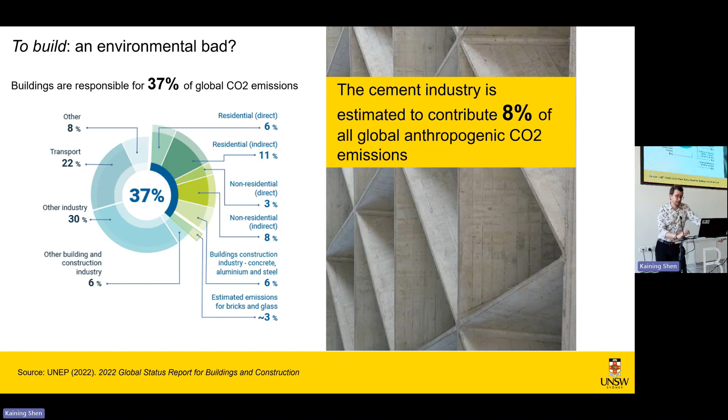The process of creating our built environments is fundamentally changing nature. This is an incredible statistic - I always find that if you weigh all our buildings and infrastructure, they now weigh more than nature. We are truly in the Anthropocene. We have now dominated nature, not in a good way even.

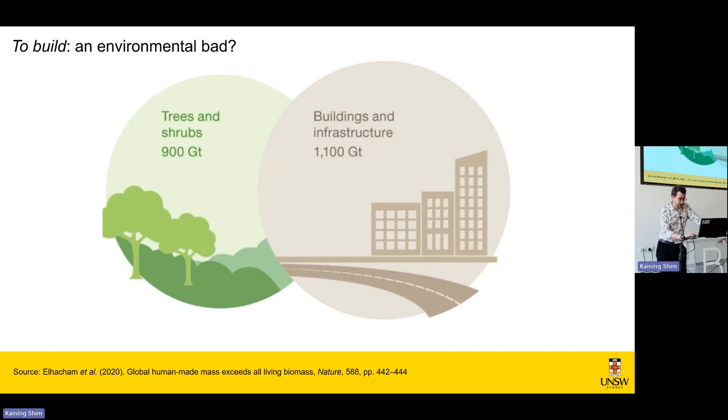So what can we do about this? This is part of what the research myself and some of my colleagues are looking at. If you measure the greenhouse gas emissions from buildings, they actually take place across what we call a life cycle. Again, you've all seen diagrams of this from cradle to grave.

If we were to create this building now, the steel here would probably be mined from iron ore, transported to a factory, manufactured, transported to site, and installed. There's emissions at all those levels. Then the building opens, we start to air condition it, and we get more greenhouse gas emissions. Then in 50 to 100 years' time, hopefully 100 years' time, we demolish the building, which also contributes to greenhouse gas emissions. All that's documented in this kind of diagram.

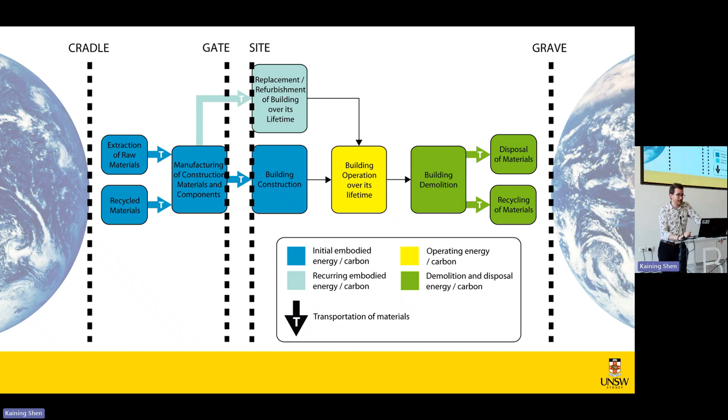The only part of that process we regulate and consistently measure is the operations. It's only really in the past 10 years or so we've started measuring all the other bits and pieces. That's part of the research I'm involved in - Will is digging away at it on a daily basis as well, looking at how we measure this and how we reduce it. So what is embodied carbon?

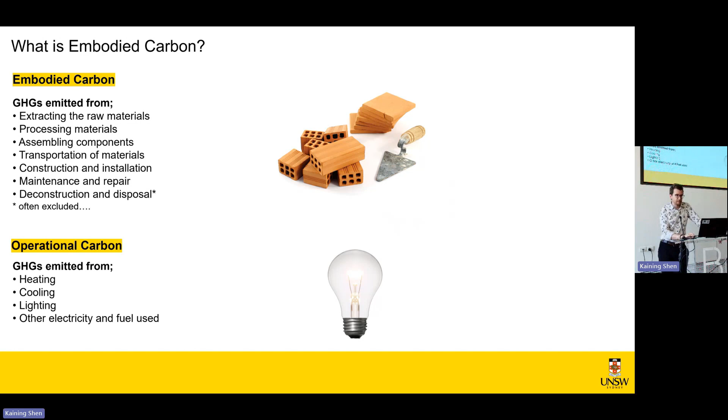Probably preaching to the converted here, you all know, but as a headline, embodied carbon is greenhouse gases related to the materials of construction. Then you've got operating carbon, which is greenhouse gases related to the day-to-day operation - the lighting, the heating, the cooling, the ventilation. At a pretty basic scientific level, if you add the two together, you can measure a building's total contribution to the environment.

Well, we've started decarbonising electricity, we've got better energy efficiency, more efficient buildings. So when we measure this now, we typically find it's about 50-50. You create a new building in Australia today, across its life cycle we anticipate about 50% of its emissions will be materials and construction, and 50% will be the energy to heat and cool the building.

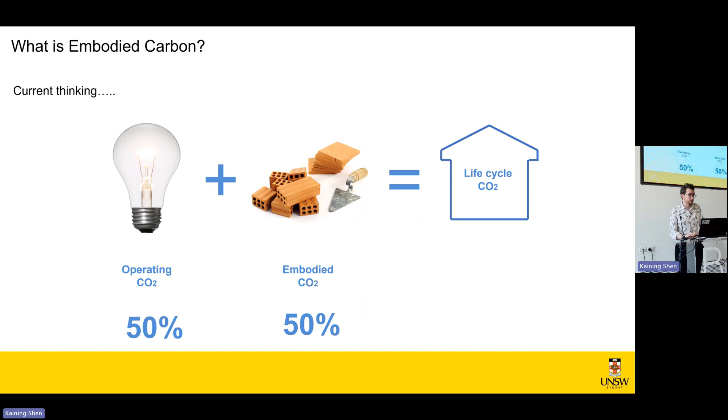But that's changing as well. Actually, there's an ambition in the Australian built environment, now in building regulations, to move to net zero operating. So all being well, by 2030, the NCC, National Construction Code, will mandate net zero operating buildings. It's a good thing, but it also means the carbon profile of our buildings will change dramatically - it means 100% of emissions will be embodied. That's a massive psychological shift. We've gone from embodied carbon being something we don't measure at all, very rarely about 20%, to embodied carbon potentially being 100%, the totality of the environmental footprint of our buildings.

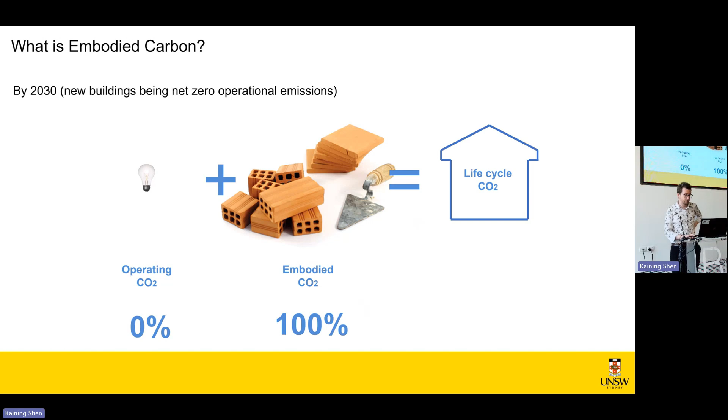You can do some simple math to understand the global impact. We know we're currently building around the same floor area as Japan every year. So between now, 2023, and 2060, we anticipate building the floor area of Japan 37 times over.

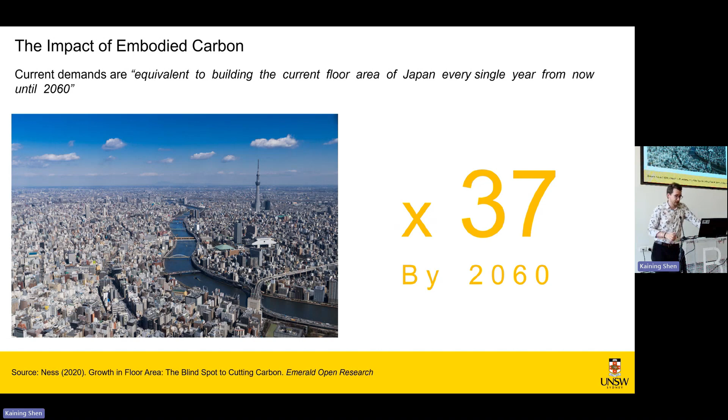About 230 billion square meters, if you're interested in the big numbers. We can work out the embodied carbon on the back of a napkin. On the left-hand side you've got the carbon budget remaining from the IPCC. This is actually out of date now, but I've kept it in. If we want a 50% chance of remaining at 1.5 degrees, we've got 500 gigatons in our carbon budget, because greenhouse gas emissions are cumulative - they accumulate.

The latest data suggests it's actually about 250 gigatons, not 500, but let's assume it's 500. Now if we carry on building the way we're building - on the right-hand side you can see the math - by 2060, if we build 230 billion square meters in the same way we build domestic Australian construction, which has an embodied carbon of about 660 kilograms per square meter... every square meter we build, like a detached house, is about 660 kilograms of CO2. If we built everything the way we build our detached housing on the fringes of the city, that would be 151 gigatons - 30% of our total carbon budget gone just through building houses, before we've turned a light switch on, before we've taken a bus ride, before we've fed a human being.

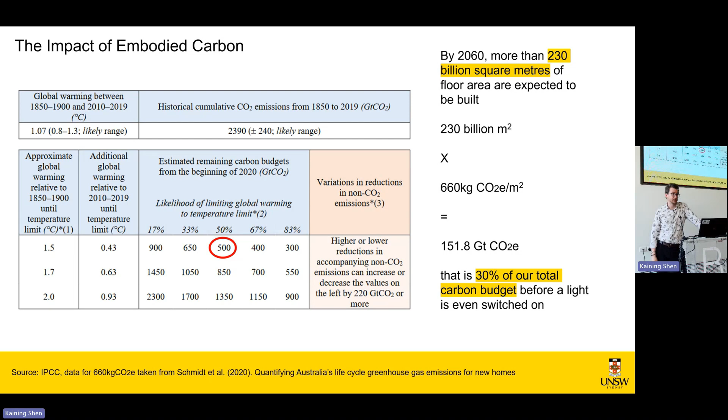That's fundamentally unsustainable, and what you end up with is what I call the global embodied carbon contradiction. This graph is from UNEP and sums up the contradiction: the dots you see are anticipated floor area, how much we're going to build globally, and the bar charts are how much carbon emissions we can safely afford to emit. How do we double global floor area while getting down to net zero?

That's the crux of a lot of the research I'm involved in at the moment - some of the projects we're looking at, which I'm going to talk you through. It's a pretty big challenge. I don't think we quite have the answer yet - we're still working on it, but it is a contradiction in terms in many ways.

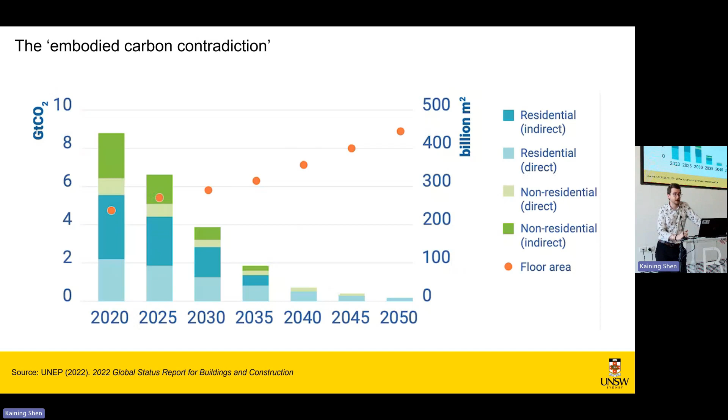There have been lots of targets proposed to reduce embodied carbon. Two fundamental ones: by 2030, the suggestion is we need to reduce it by 40%, and by 2050 we need to get down to net zero embodied carbon - a term that two or three years ago didn't even exist. It's still, at the moment, a pretty ethereal term in itself.

That's the theoretical background to all of this. I'm going to talk you through three or four projects we're doing at the moment to look at embodied carbon. They're in no way as impressive as Professor Ung's multidisciplinary projects, and I'm lucky enough to not be working with too many difficult people, which is good, but I'm sure it will happen soon.

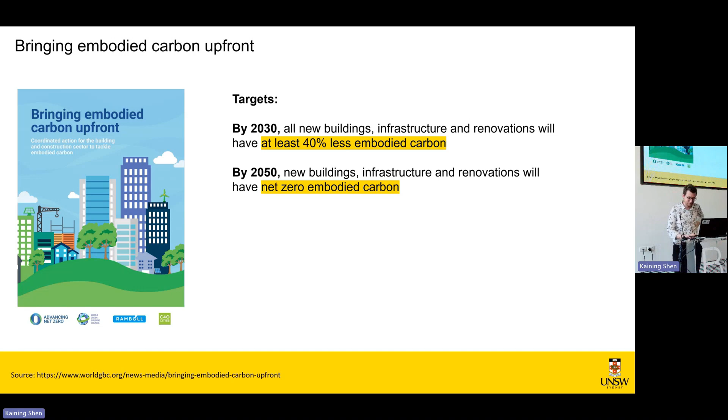The first project was a collaboration with Multiplex through Deo Prasad's CRC for Low Carbon Living, which we called Carbon Value Engineering. This project looked at what changes we can make to buildings to reduce embodied carbon - simple changes we can make during the design stage. One of the most fundamental challenges with embodied carbon is the structure; structural material is typically about 40% of embodied carbon. So we looked at what alternative structures and structural materials we could utilize to reduce this.

We simulated this as-built building - I think an 18-story residential mixed-use building in Sydney, with 5 stories of underground car park made out of concrete. We looked at several different structural configurations to reduce embodied carbon. The building had an embodied carbon of about 750 kilograms of CO2 per square meter.

If we change the concrete frame to a concrete post-tension floor, we can save 8%. Change to a steel frame and CLT floor, we can save 16%. The most sustainable, lowest embodied carbon option was a whole timber building - we're starting to see the emergence of timber now as an alternative structural strategy, where we can save about 26% of embodied carbon without impacting the GFA.

We deal with the costing of these buildings as well. Technically, that timber building could be about 5% cheaper than the concrete building, but developers put an additional level of cost against these kinds of buildings because of the innovation in them. So timber buildings tend to be more expensive, but from a fundamental materials perspective, it will be cheaper as well.

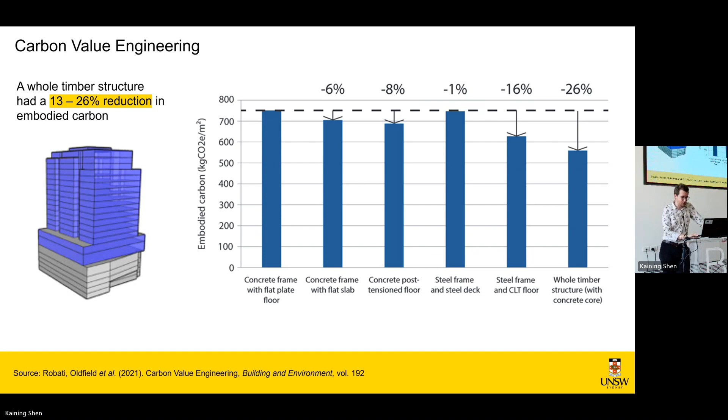We cranked this project up with another project I'm working on with Will, called How Low Can We Go. So we've not only started changing the structure, we've gone, okay, what else can we change? How low can we make embodied carbon?

We've taken a 6-story office building, which is the blue bar on the left-hand side, and started changing the building. We changed from a concrete to a timber frame building. Brilliant, you can save a little bit.

Then we started changing the window to wall ratio. We changed from an aluminium skin to a timber and aluminium skin. We put straw in the facade.

We changed the grid. One of the big challenges with embodied carbon is we like big grids. I think this building had a 9x6 grid to start with, so we changed it to a 3.5x6, much closer grid. Many more columns. Architects don't like columns, I like columns, I'm on a campaign to embrace a column. If you get a chance today, give a column a cuddle. Give it a hug. Columns are good.

If we add more columns in, we reduce the embodied carbon of the floor. Simplest way you can reduce embodied carbon is by adding columns. So we added more columns, and more and more we recycled as much material as we can. We probably saved about 50-55% of the embodied carbon.

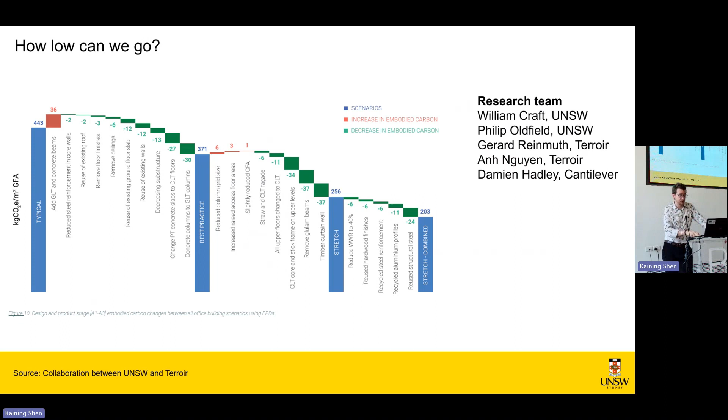What's really interesting, though, is that gives you just a snapshot. When we consider the temporal nature of carbon emissions - buildings emit carbon over their life - we include the sequestration of the timber. When trees grow, they photosynthesize, absorb carbon dioxide, and store it as carbon in the woody biomass. But at the end of the building's life, typically that timber's burnt or landfilled, and it re-emits the greenhouse gas emissions.

If we consider that dynamic process as well, we can actually get down very, very close to net zero embodied carbon for a period of time. The bottom blue line is the lowest embodied carbon building we could get - about 82 kilograms of CO2 per square meter, which is super low. And we think we can get down to negative figures, at least temporarily.

So it demonstrates that net zero embodied carbon can be achieved, but you've got to basically game the system a little bit. There's a lot of controversy around whether timber stores carbon, how you balance that, how you mitigate for it, and how you measure it as well. But that's one of the projects we're involved in.

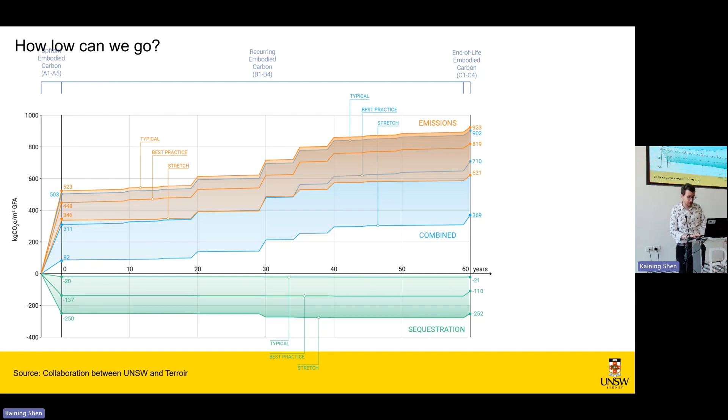Another project we do - and I've got to big up my PhD student, Unique - I'm sure in the future she will go to Hong Kong and work for Edward, like a well-traveled path of our graduates. Eunike is doing her PhD on adaptive reuse and vertical extensions.

We all know adapting a building, recycling a building, is more sustainable than knocking it down. It's pretty obvious. The problem is, with a 4-6 story building in the Sydney CBD, that's not financially viable - people want to build a 10 or 15-story building. So that's why we knock these buildings down. What Unique is looking at is, can you build on top of the existing building? You recycle a building and then build extra stories.

On the structure, we've been doing research on historical structural codes and found many buildings, particularly industrial buildings, have significant amounts of excess structural capacity. They're over-engineered, so we can build timber extensions on top. The diagram here maps different vertical extensions globally, and you can see the large number of industrial buildings that tend to be built on top of, because they've got this additional structural capacity.

They're meant to have big machinery inside them. They get changed to residential - you take the machinery out, and you've got these big columns that can actually take extra floors.

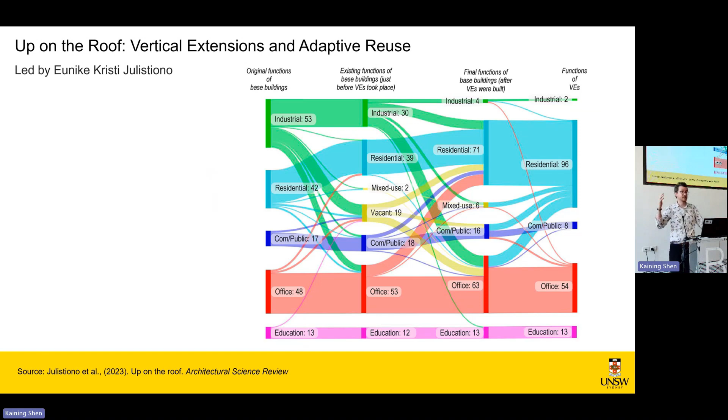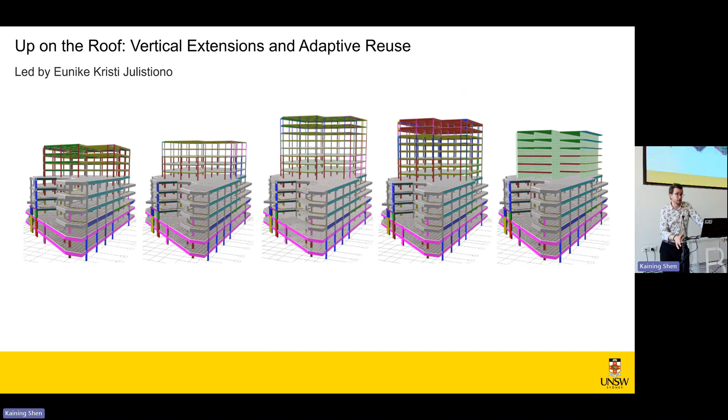Eunike is doing a lot of research at the moment, taking example buildings in Sydney - I think this one was formerly a school - and looking at how many stories of additional concrete we could build on top of it, how many stories of additional steel, how many stories of additional timber. So we can create new space while also reducing embodied carbon.

I'll finish with a big study we did a few years ago, which asks the question: can we get Australia down to net zero? Can we get the built environment of Australia down to net zero? This was a project collaborating with UNSW, Monash, CSIRO, UTS, and others, sponsored by the Digital Grid Futures Institute. We modelled economy-wide pathways to achieve net zero greenhouse gas emissions in the Australian built environment, modelling all commercial and residential buildings in Australia between 1990 to 2050, considering both embodied carbon and operational emissions.

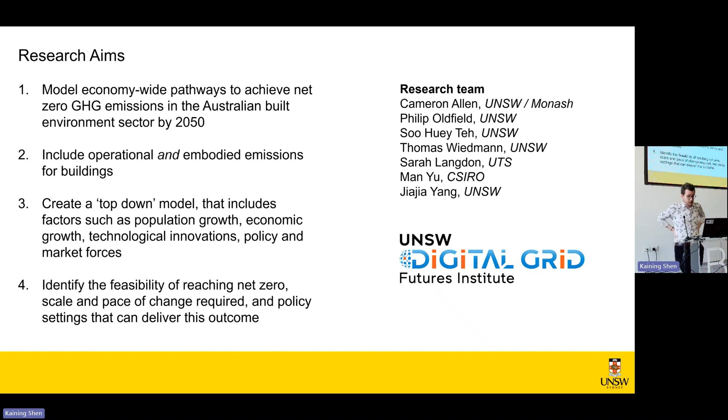The model is what we call a top-down model, not a bottom-up one. Instead of saying we're going to double the amount of floor area, it says floor area is linked to migration and floor area is linked to wealth. So we track wealth and migration, and that determines floor area in the model, and that determines greenhouse gas emissions.

We wanted to look at the feasibility of reaching net zero through that kind of model, and used 3 different scenarios. There's a business-as-usual scenario, which includes higher population growth, higher temperatures, and higher resource demands—if we carry on as normal. That assumed 30 to 50% of all buildings in Australia will be electric by 2050, and 60% renewable energy at the national level by 2050.

Then we had 2 low carbon scenarios. Scenario 1 had lower population growth—remember, population growth in this model is linked to floor area—additional investment in energy efficiency, so 80% of all buildings electric by 2050, and 80% renewable energy in 2050. Then the stretch scenario, fingers crossed, maybe we can do this: 100% electric buildings by 2050, 100% renewable energy by 2050.

One of the big changes we did was crank up the timber buildings. We said every year there'll be an increase in timber multi-story buildings, up to 30% by 2050. So 2021, 1% of buildings were timber, 2022, 2% were timber—we really cranked up the amount of carbon storage we could embed within the built environment.

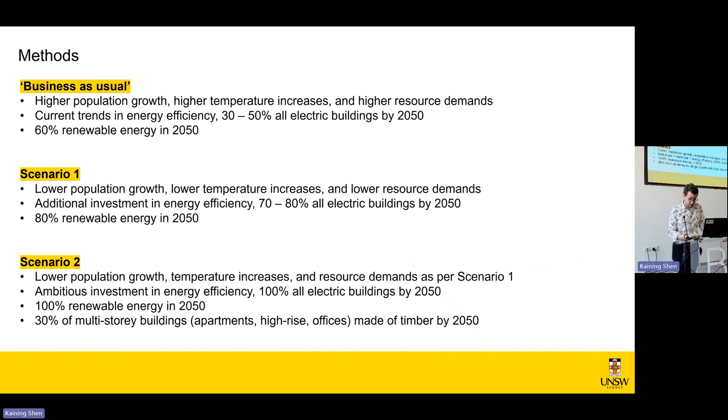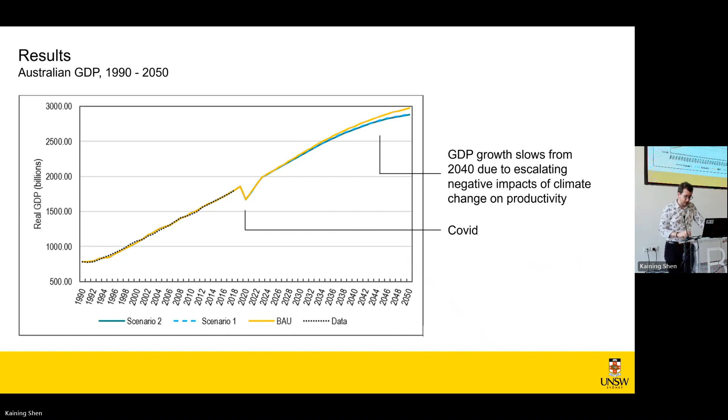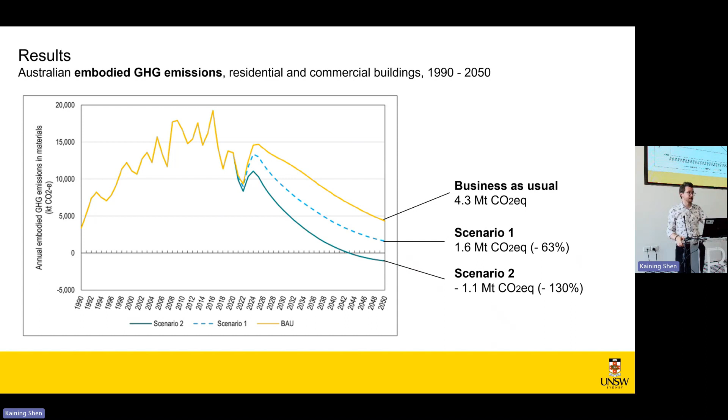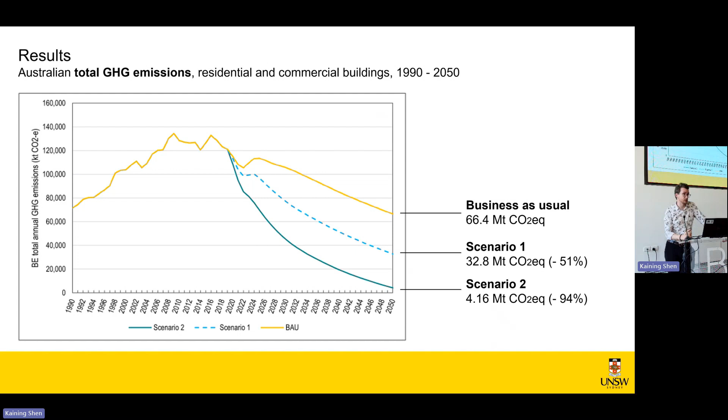Now, this study did have some limitations. That reduction could be quicker—we feel it could have been made by 2040 if we built smaller. But the model did not allow smaller buildings. The model said as people get wealthier, they buy bigger houses, which is a well-known kind of algorithm. But if we reduce the floor area and allow people to live in more compact, high-density environments, that probably would have reduced it quicker.

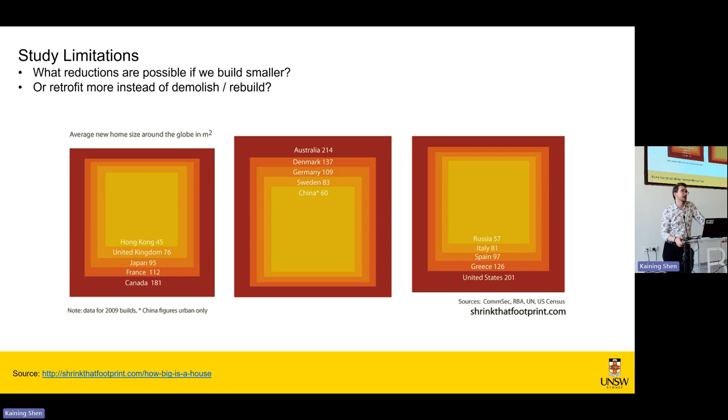We also didn't manage any retrofit into the algorithm either. So with retrofit, instead of demolish and rebuild, it's possible we could have made that reduction down to net zero even quicker.

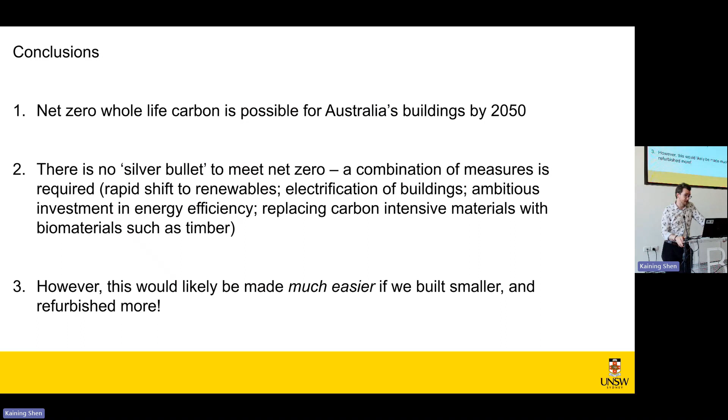So just some headline conclusions: we did find net zero whole-of-life carbon was possible by 2050 in Australia, but there's no silver bullet. We're not going to timber our way out of this mess, as I like saying. It's a combination of measures: rapid shift to renewables, massive electrification of buildings, ambitious investment in energy efficiency, and replacing carbon-intensive materials such as concrete with timber where possible. And it's made much easier if we build smaller and refurbish more. Thank you very much.